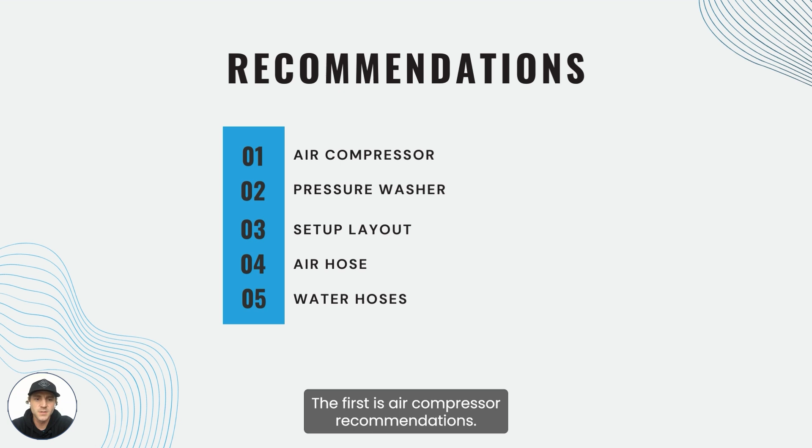In this video, we're gonna be talking about equipment we recommend with our snowmaking systems. We'll go through a couple different recommendations: first, air compressor recommendations; second, pressure washer; third, setup layout; fourth, air hoses; and fifth, water hoses.

Let's take a look first at the air compressor. We'll walk through 5 factors to be aware of when picking out your air compressor. First is what the air compressor can output as far as airflow and pressure. For all of our products, we recommend at least 5 CFM at 90 PSI. The Little Cloud snow gun can operate at 4.5, but as a general rule, 5 CFM at 90 PSI is the minimum and our recommendation for all the snow guns we provide.

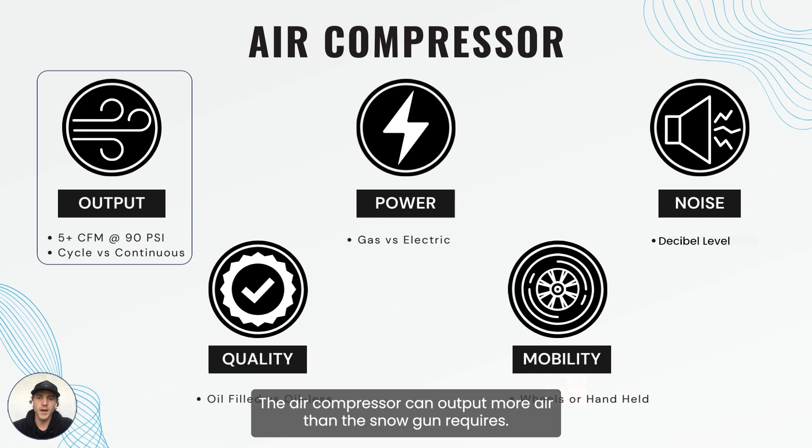The next thing to look at is if you have a compressor rated over 5 CFM at 90 PSI. It'll work great in the system, but you can expect that compressor to turn on and off during operation, meaning the air compressor can output more air than the snow gun requires. Once it builds up pressure in the tank to a certain level, it'll cycle off, and as air exits the tank into the snow gun, it will turn back on at a minimum pressure usually set on the air compressor.

The next thing is power. Are you going to use a gas or electric air compressor? Most common are electric. Gas can be used if you're in a remote location or if it's easier for some specific reason, but in general we would go with electric. If you're running it overnight or don't want to continue monitoring the gas tank, electric is definitely the way to go.

Noise is also something to consider when running equipment. Make sure to check the decibel rating on the air compressor. Something as quiet as possible is usually the best.

The next thing is quality. A good way to quickly check quality is if it's oil filled or oilless. Oilless compressors are typically a little bit lower quality. Oil filled is typically higher quality just because it requires that lubrication.

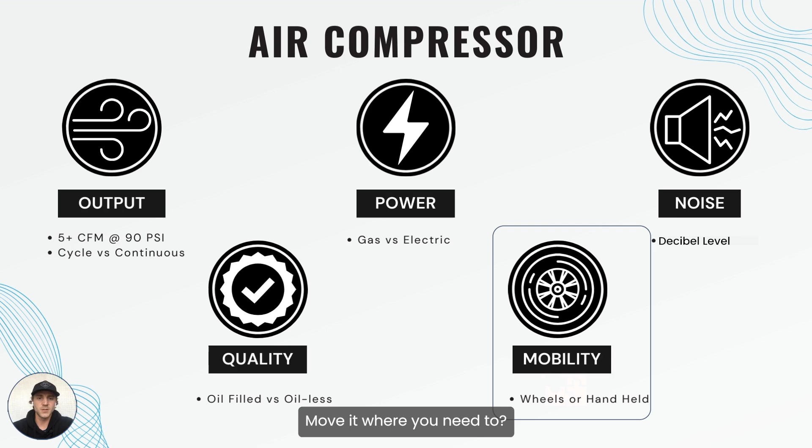And lastly, something to consider would just be mobility. How mobile is your air compressor? Do you need to move it around a lot, or can you pick it up and move it where you need to? How much do you value that ability to move your air compressor around?

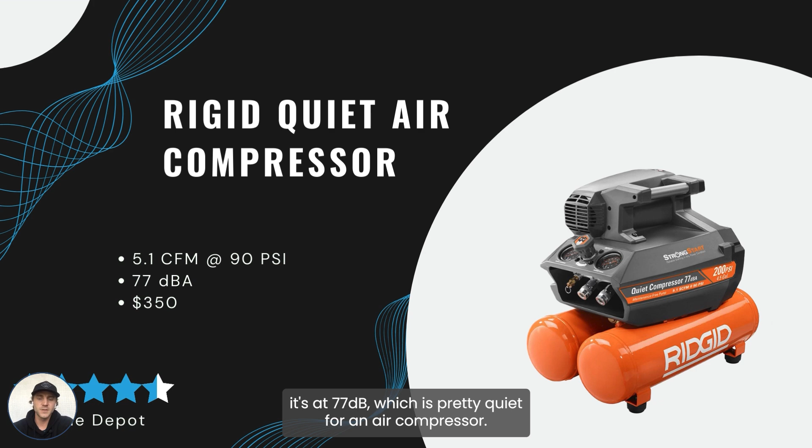With all those factors considered, what we recommend is the Rigid Quiet air compressor. This air compressor sits right at 5.1 CFM at 90 PSI, right above that minimum for all of our products. It's at 77 decibels, which is pretty quiet for an air compressor, and it runs about $350, which is a really good price for what works well with this system.

Let's look at the pressure washer and some things to consider when picking out the best one for your system. The number one and most important thing is output. The GPM rating is going to have the biggest impact on snow output, so that's the main thing to consider—how much water that pressure washer can move through the system. The higher the GPM rating, the more snow you'll make.

Let's look at power with the pressure washer. You can either get a gas or electric powered pressure washer. For most people, we'd recommend electric. There's a few different options for power requirement. We have our 110 volt or 120 volt outlet, which plugs into almost every outlet in your home. A pressure washer that works on 110 or 120 volt power will do between 1 to 2 GPM.

Once you get above 2 GPM on an electric pressure washer, it moves into the 220 volt power requirement, so that's important to note. If you want a higher GPM rating with one pressure washer above 2 GPM, you'll have to jump up to 220 volt. We'll go into more detail on how you can increase snow output with smaller 110 volt pressure washers running together—check out our video on using multiple pressure washers in the system. For this recommendation, we'll keep it simple.

Next is noise. The smaller pressure washers that are more residential will be louder, and more industrial or commercial style pressure washers will have a lower noise level.

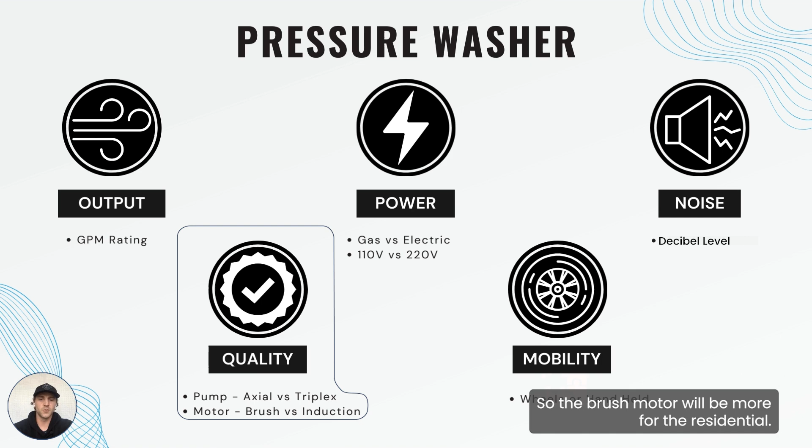The brush motor will be more for residential use, and the induction motor will typically be on a more industrial or commercial pressure washer. Again, mobility is important with the pressure washer. Do you need it to be on wheels, or can it be handheld? How important is that to you?

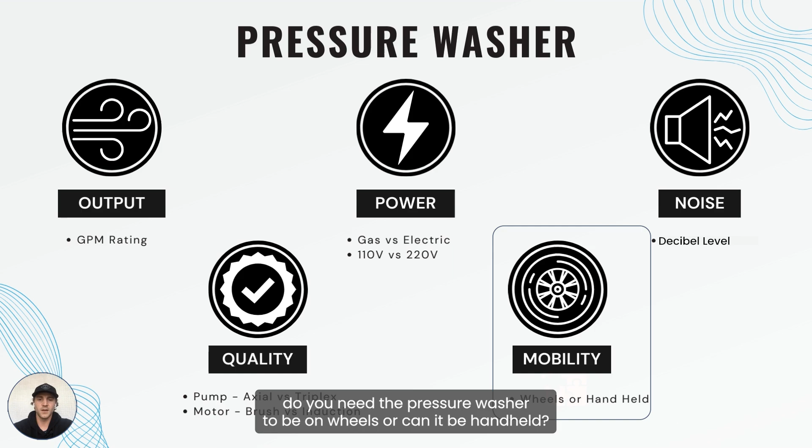With all those factors to consider, we have two different recommendations. The first is the Ryobi 1.2 GPM pressure washer. It's one of the cheapest pressure washers you can find, right around $100. It outputs 1.2 GPM, so around 1 inch of snow per hour. It's more residential, and a little bit louder as far as noise goes, but if you're looking for the best bang for your buck, the Ryobi is definitely one we recommend.

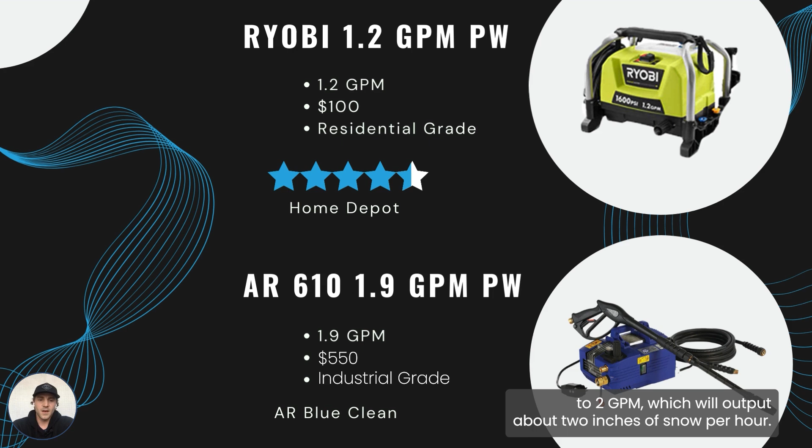The more commercial option we recommend is the AR610 pressure washer. It does about 1.9 GPM, close to 2 GPM, which outputs about 2 inches of snow per hour. So it's close to double what the Ryobi pressure washer produces.

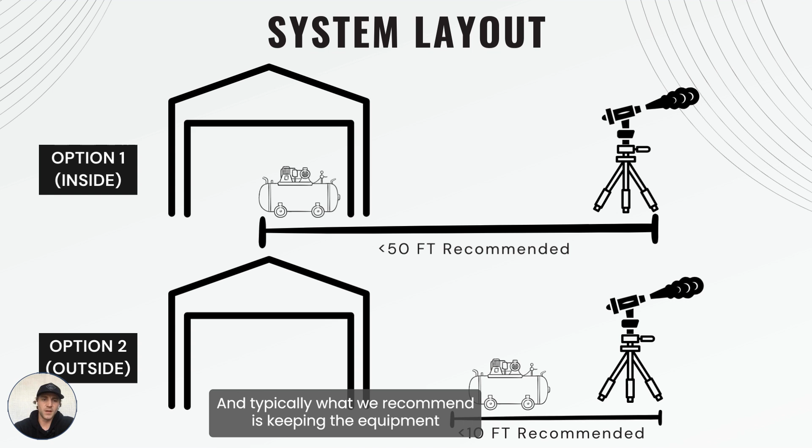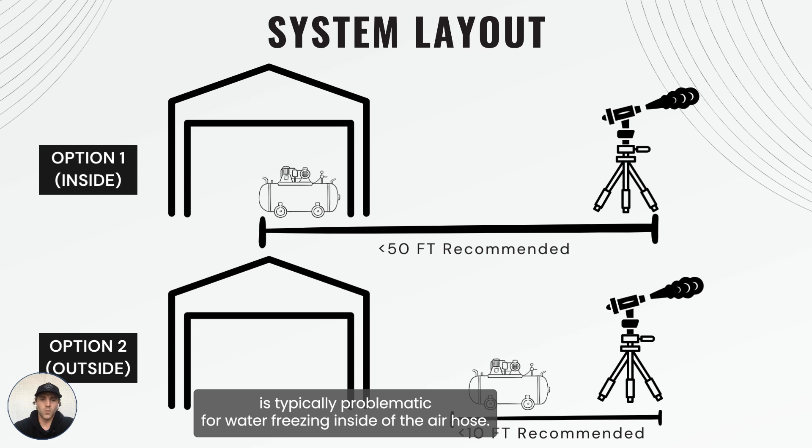There are a few different options for how you can set up the snow gun and the air compressor and where they're located. The first option is running your equipment inside a garage or shed. Typically what we recommend is keeping the equipment about 50 feet or less away from your snow gun. The main reason is the air compressor and air hose - a long air hose is typically problematic for water freezing inside it. We'll go more in depth in the next slide, but if running inside the garage, keep it about 50 feet away. You can go longer, but then there are other modifications we'd recommend.

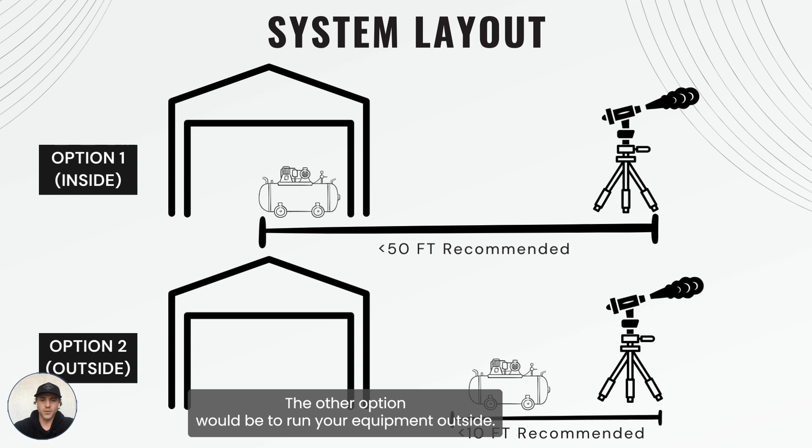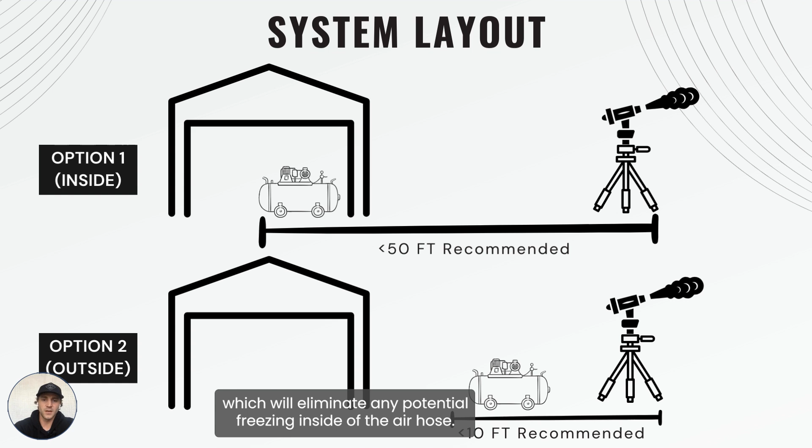The other option is to run your equipment outside. When you run the air compressor outside, it can pull cold air from outside, which helps the freezing in the bottom nucleation nozzle. You can also use a shorter air hose, which eliminates any potential freezing inside it. Obviously there's potential risk running equipment outside with weather, but overall the second option is what we typically do, and we've done both - they both work.

Let's talk quickly about the air hose. It's the most important hose in the system. Our recommendation is to use rubber since it's best in cold temperatures. If you get PVC air hoses, once it gets cold, it's going to be hard to move - it's not very malleable.

For air hose length, if you're running your air compressor outside next to the snow gun, you'll want a hose that's 10 feet in length or shorter, which is best for snow quality. 10 feet and below gives you good space from your air compressor to the snow gun, and it eliminates potential water droplets in the compressor from freezing as they travel through the air hose into the snow gun.

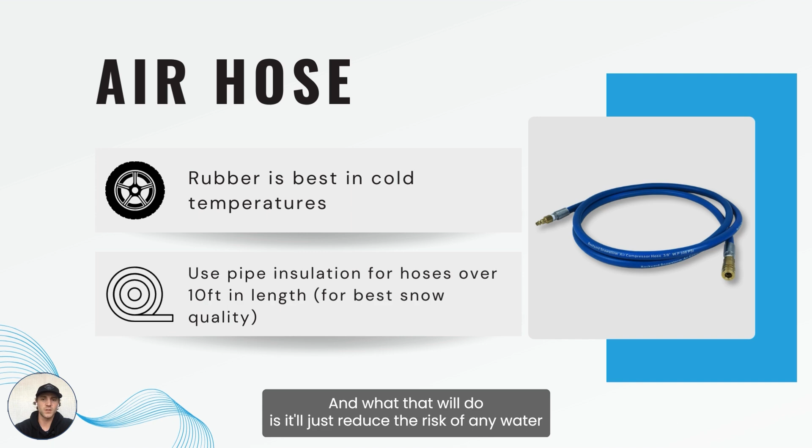If you run your system longer than 10 feet, or run the air compressor inside your garage, we definitely recommend insulating your air hose to eliminate ice buildup. So if you use a 25-foot or 50-foot air hose, you can get pipe insulation and run it along the length of the hose, which will reduce the risk of water freezing inside and keep snow quality high.

For the water hoses, rubber is going to be the best in cold temperatures. So the garden hose and the pressure washer hose, both being rubber, will help you move your system around easily.

Another tip: when running a long distance from your garden spigot or water source, you want a longer garden hose or low pressure hose rather than a longer pressure washer hose. This reduces the pressure drop in the pressure washer hose and puts the distance on the low pressure side of the system. Typically, if your water source is about 50 psi, running a really long garden hose to the pressure washer will lose a little pressure, but you'll still get water to the pressure washer. Once it pressurizes the water, it sends high pressure water to the snow gun, and keeping that distance short ensures the pressure stays high.

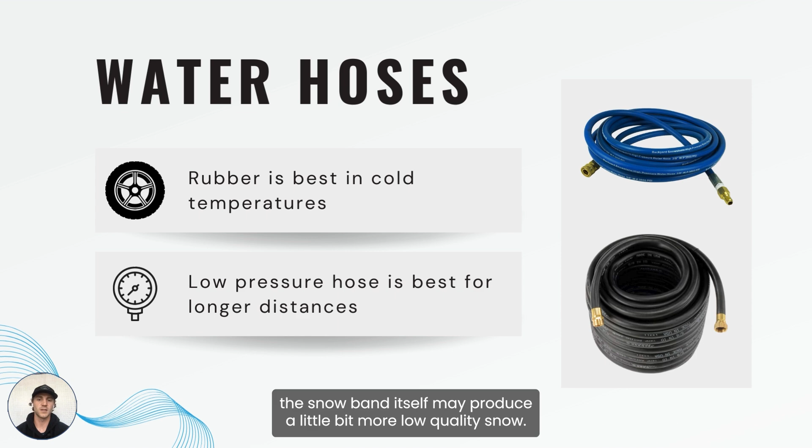If you run a really long pressure washer hose from the pressure washer to the snow gun, you can drop that pressure over the distance. The snow gun itself may then produce a little bit more low quality snow.